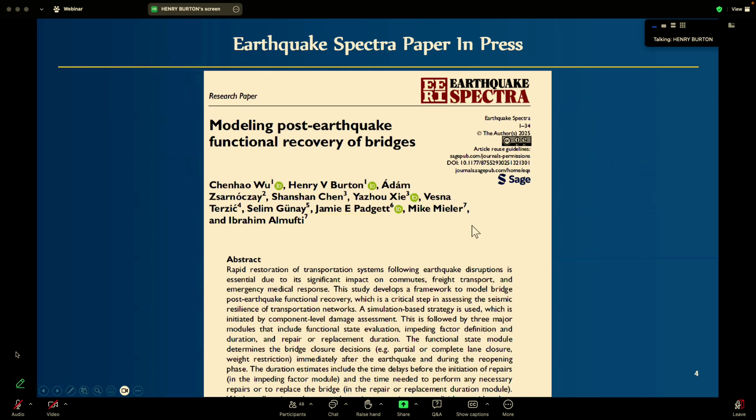So as I mentioned earlier, what we're interested in, when we say risk and resilience, our performance metric is the post-earthquake functional recovery of these bridges. We recently published a paper here that's going to be released in Spectra. I'm going to quickly go over the framework so you can get a sense for how we're assessing performance, but you can get more of that information from that paper.

Part of the motivation is that Caltrans has been continuously advancing its seismic design objectives. Initially, it was just based on life safety, where you had to evaluate your bridge for a design-based earthquake, a 975-year return period. Then in version 2.0, that was extended where you had to also look at a functional evaluation earthquake based on a 225-year return period.

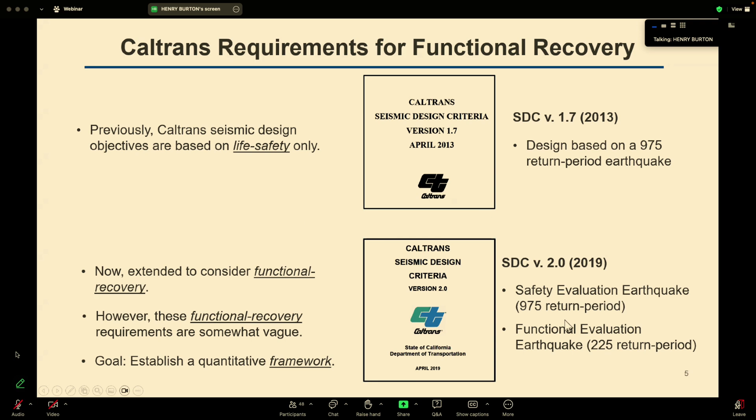Part of what we're trying to do here is get a little bit more specific in terms of how you can do functional recovery evaluation for bridges, and have an explicit quantitative framework that you can use for that assessment.

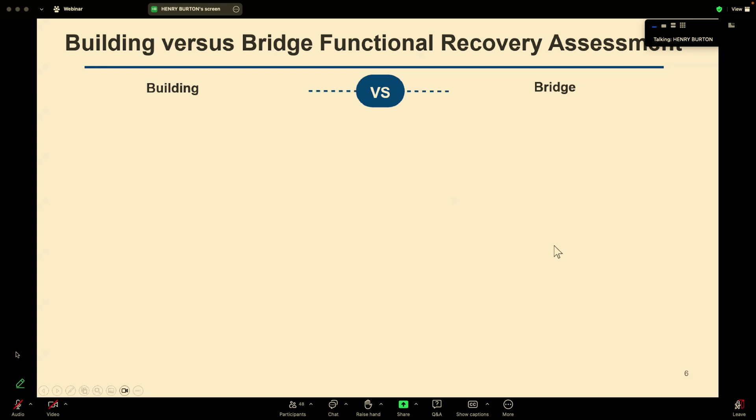Now, as I'm sure a lot of you know, there's been a lot of work done on functional recovery for buildings. It's part of the national dialogue, particularly within the earthquake engineering community, with folks involved in the building code trying to advance it. But there are a lot of differences when it comes to functional recovery for bridges versus buildings.

For example, the ownership is very different. Buildings are typically owned by homeowners and businesses, and the repair efforts tend to be very decentralized.

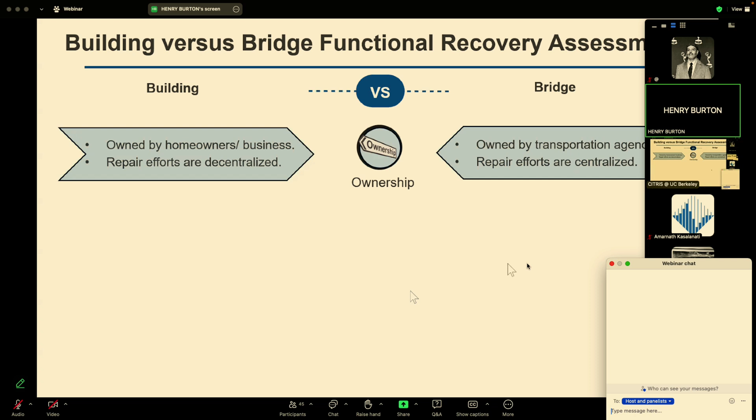So like I was saying, there are a lot of differences when it comes to thinking about functional recovery for buildings versus bridges. I talked about the differences in ownership. The way that we define the different recovery states for buildings versus bridges is also different. For buildings, we focus on reoccupancy, functional recovery, full recovery. Whereas for bridges, we think about the ways that bridge access can be limited, like lane closures, weight limits, speed limits, things like that.

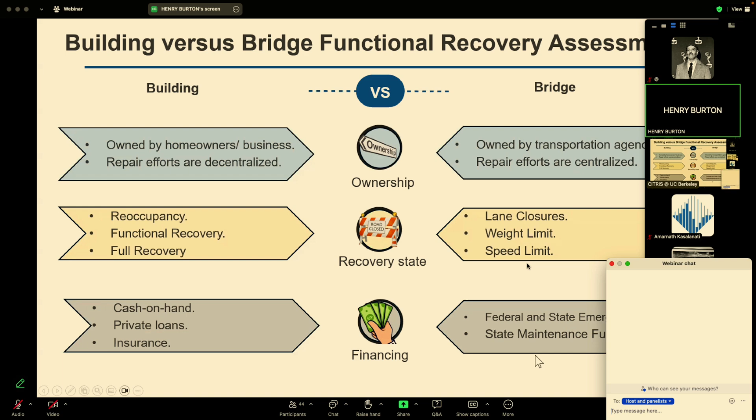And then the financing structure is also very different. Building owners rely on having cash on hand, private loans, insurance, whereas for bridge networks, there's a reliance on federal and state funds and state maintenance funds.

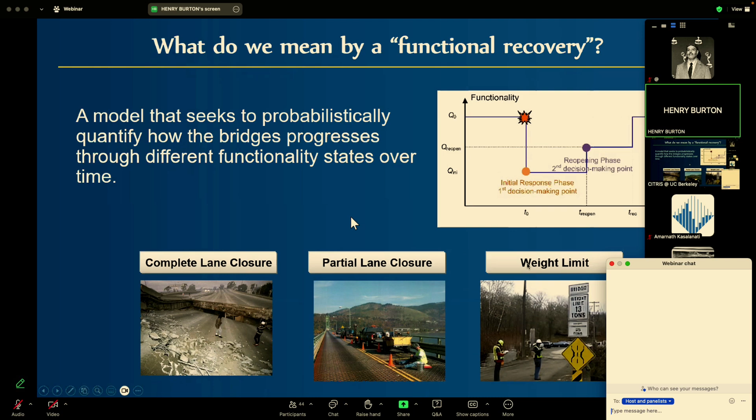So when we talk about functional recovery, what we mean is that we have a model that probabilistically quantifies how the bridge progresses through different states of functionality while accounting for these different types of disruptions that I just mentioned. This is a high level overview of the framework.

The first two steps, the hazard and damage analysis, are sort of typical, unchanged relative to the PBEE framework that we all know and love. It's this second portion here that we spent a lot of time on, things like how do you define the functionality states, thinking about impeding factors, repair activities, and coming up with the recovery time.

Getting a reasonably well representative structure for all of this was not an easy task.

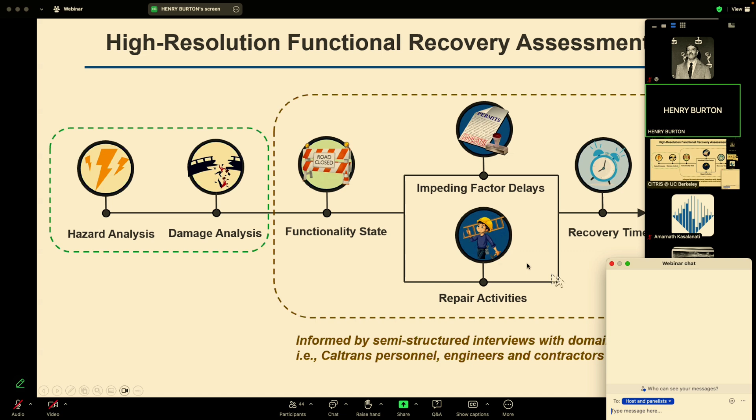We spent a lot of time in conversation with folks from Caltrans and local California engineers and contractors to get a better sense of, one, how these different organizational factors are architected, as well as what data are needed, particularly temporal or time-based parameters, and how those are used within the post-earthquake environment.

Just quickly, for the damage analysis, the framework accommodates a couple different approaches to simulating and assessing damage.

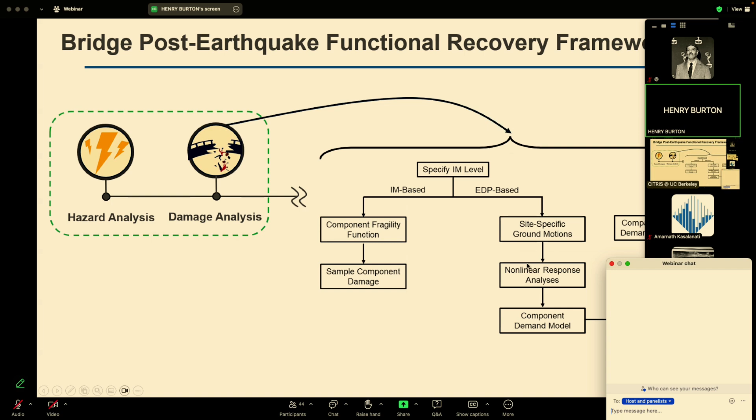You can do what we call an IM-based approach, where you simulate the spectral intensity at the site of interest, and then based on fragilities defined for the bridge component that link the shaking intensity to damage, we can sample the damage. Or you can do an EDP-based approach, where you start with site-specific ground motions, do response history analyses, and then have a component demand model that you probabilistically compare with a capacity model to simulate damage.

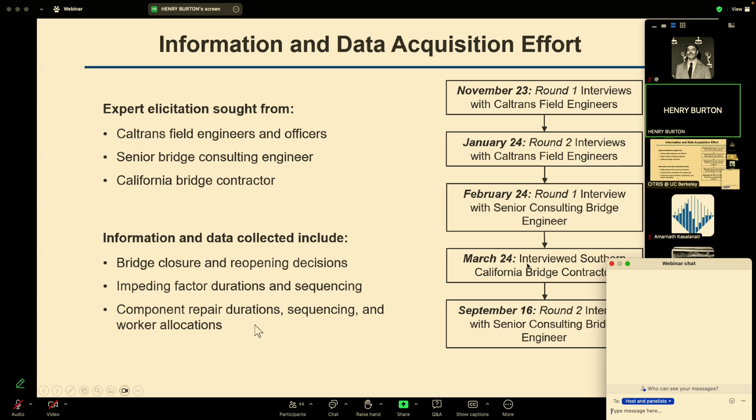I mentioned before that we spent some time getting information from Caltrans field engineers and officers, California bridge engineers, as well as contractors. We had 5 different rounds of interviews, which allowed us to collect different types of information and data, like information about bridge closure and reopening decisions, what impeding factors we have to consider, how they're sequenced, and what their durations are. Similarly, for component repairs, how are they sequenced, and trying to be realistic in terms of worker allocations.

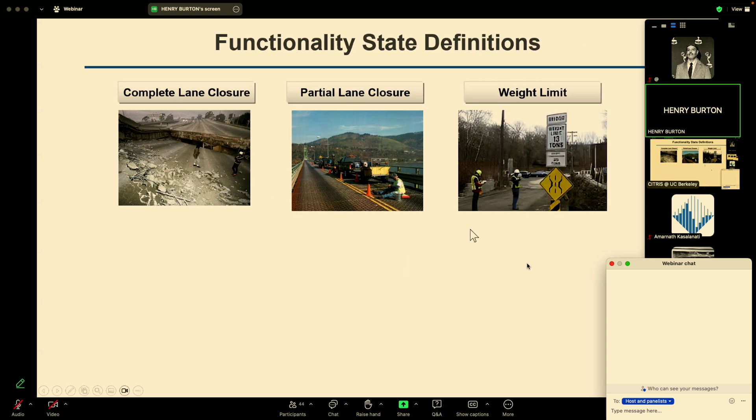So I mentioned earlier, for the functionality state definitions, the disruption of functionality is based on these three inhibitions: either complete lane closure, partial lane closure, or reduction in the weight limit. Based on that, we have 7 discrete functionality states.

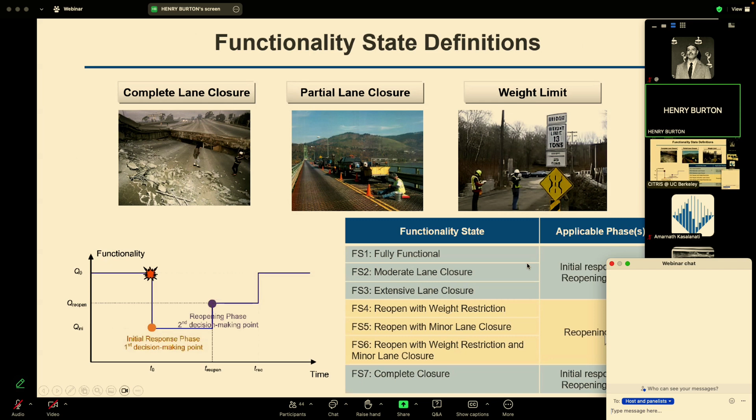4 of them are associated with the initial response, meaning right after the event. You have 4 functionality states that can happen either right after the event or during the reopening. Then 3 of them, 4, 5, and 6, are only applicable to the reopening phase.

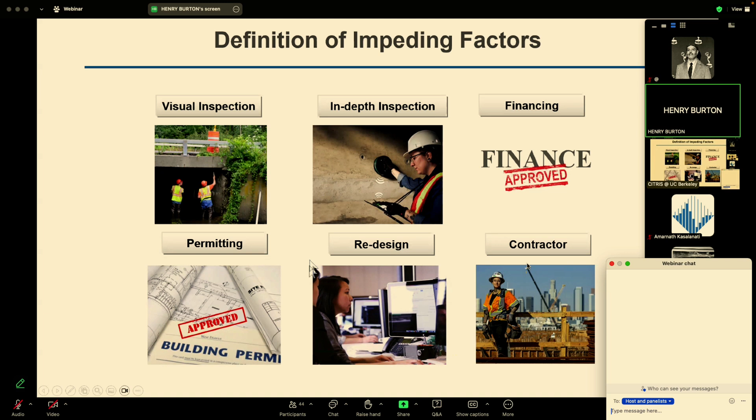I mentioned before, one of the things we had to spend a lot of time thinking about was the impeding factors. These are activities that need to be carried out before you can even start the repairs. As we know, based on experience with buildings, these can take quite a bit of time, and depending on the amount of damage, the duration can even exceed the repair time. So it's important that we consider these things.

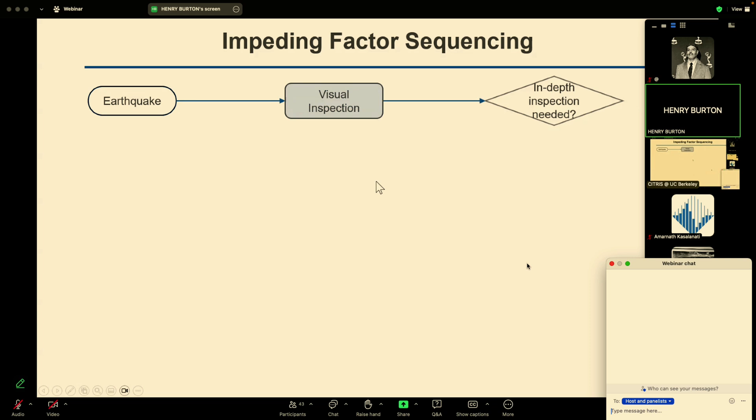In addition to considering these impeding factors, it's important to understand the workflow after an earthquake, and how that affects the sequencing of the impeding factors. Right after an earthquake, there's typically a visual inspection of a bridge, and based on that, a determination of whether an in-depth inspection is needed—cases where it's not obvious whether the bridge should be partially or fully closed. Then based on that in-depth inspection, you finalize the bridge closure decision.

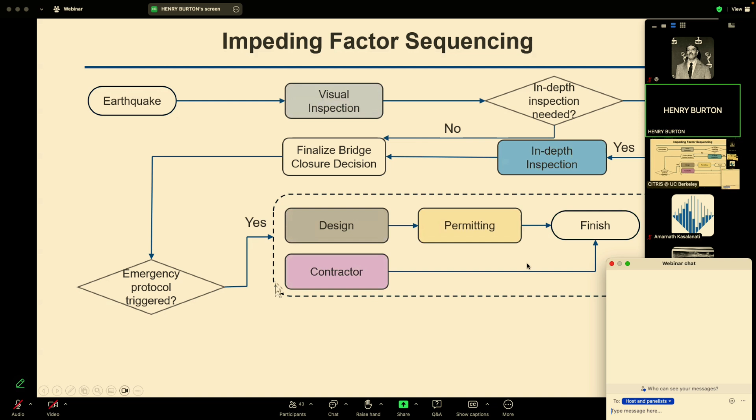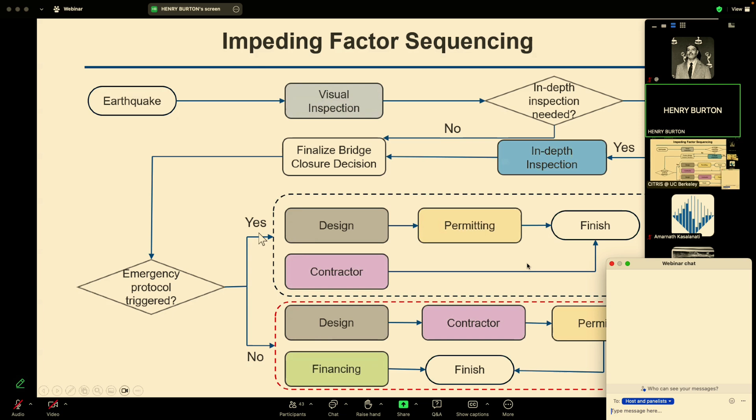Then there's a sequence of activities that need to happen: design, acquiring a contractor, permitting—and the sequence of these depends on whether or not an emergency protocol is triggered. Basically, the emergency protocol fast-tracks the selection of the contractor, done in parallel with the design. A lot of that is predetermined—there's a predetermined protocol for how to sequence this based on whether or not there's an emergency protocol. So we can consider the case with or without that emergency protocol.

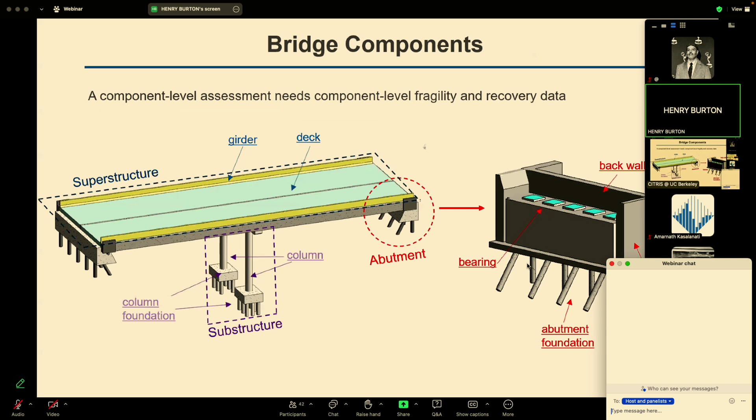Okay, so we're doing component level assessments—simulating damage to individual components, and these are the components we're considering here. For the abutment, we can zero in and look at the different types of components associated with it. In addition to understanding what the components are and their vulnerability, we need to understand how the repairs of these components are sequenced.

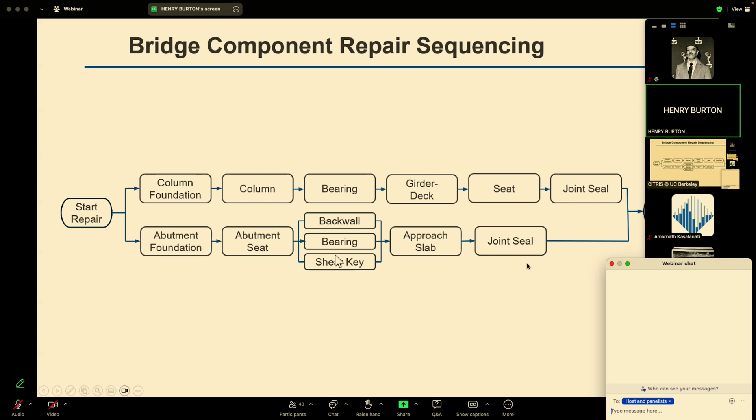So what I'm showing here is for 2 different types of bridges. The row at the top is for a diaphragm type bridge, and the row at the bottom is for an abutment type bridge, showing for those two types of bridges how the sequencing of the different types of components must be carried out.

So I mentioned before that what we've done to date is a pilot study where we looked at a single, identical bridge. We have an OpenSees model for it, and we placed that bridge at two different sites based on the simulated ground motion field. One site had a Joyner-Boore distance of about 1 kilometer, and the other about 24 kilometers.

The bridge we considered was what Caltrans classifies as an Era 3 bridge, meaning it was designed and constructed after 1971. It has two spans, three columns per span, and it's a seat-type abutment bridge.

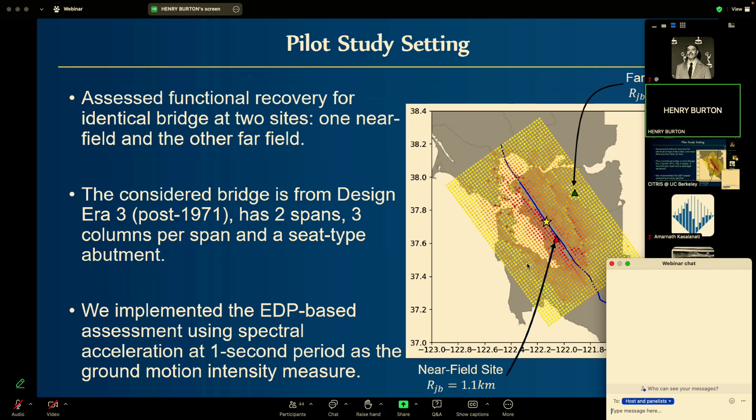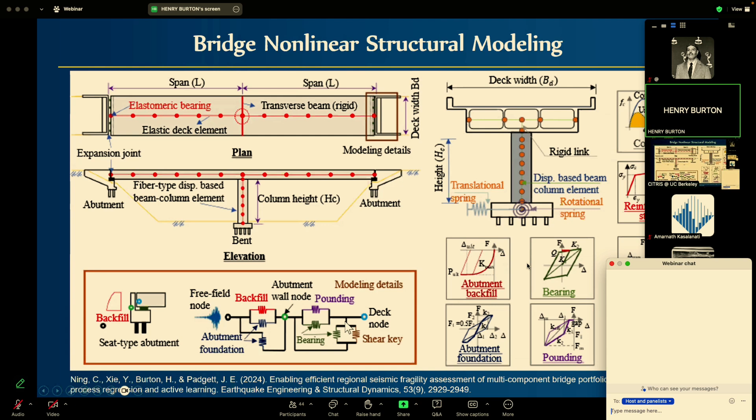We implemented the EDP-based approach to assess the performance, meaning we started with an OpenSees model. We took 50 realizations of ground motions at each site and did response history analyses. This is a quick overview of the detailed nonlinear structural model we used. I won't go into too much detail, but we're modeling in detail a lot of the components and their response, which we need to simulate the damage for.

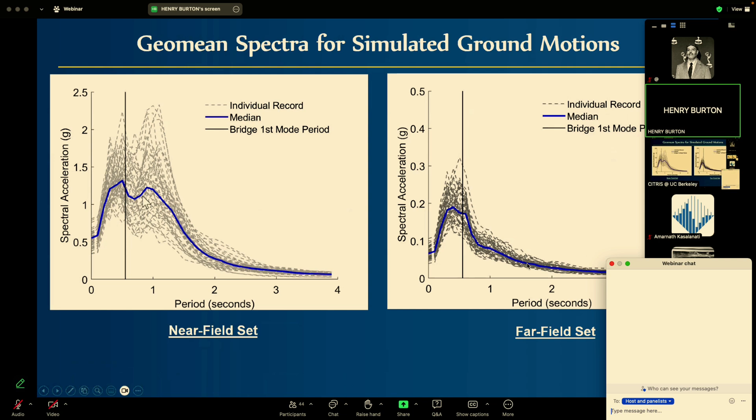As mentioned, we have two sites: one at a Joyner-Boore distance of about 1 kilometer, the other about 24 kilometers. This slide shows the geomean spectra for those two sets of ground motions. If you look at the vertical axis, they're scaled differently because of differences in intensity. For the near-field set, the peak is at 2.5, and for the far-field set, it's at 0.5. That gives you context into the differences in shaking intensities between the two sets of ground motions. The vertical black line shows the bridge's first mode period, about half a second, which gives a sense of where the modal response is relative to the spectral shape of those ground motions.

So we took those ground motions, we have an OpenSees model, and we ran the ground motions through it. What we get is a set of response demands for different types of components. Earlier I showed about a dozen or so components that we're explicitly modeling the response and damage for. Here I'm just showing a couple of them for illustrative purposes.

What I'm showing here is the probability density function for two types of components. On the left is the column curvature ductility response, and on the right is the deck unseating displacement. The one on the right is basically the demand parameter used for simulating the unseating of the deck. These are what we call the two primary components, considered the safety-critical components.

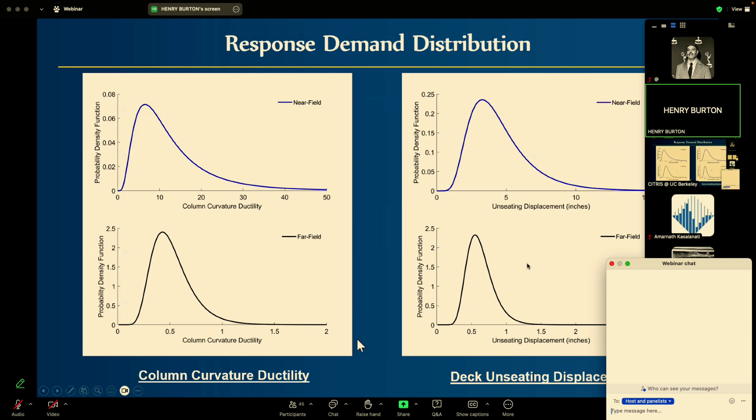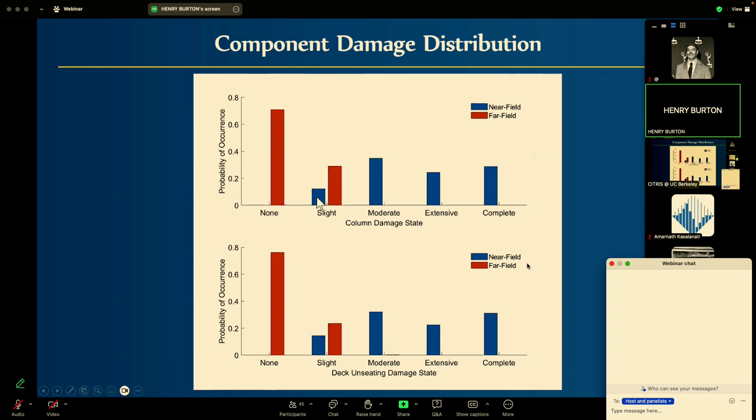Once we have those responses, we can probabilistically combine the demands with the capacity and simulate component-level damage. What we're showing here is the empirical distribution of damage for the columns as well as the deck unseating damage state. You can see the distribution of damage for the near-field ground motions is much more skewed to the right, towards heavier damage, while for the far-field, it's much more skewed towards either no damage or slight damage.

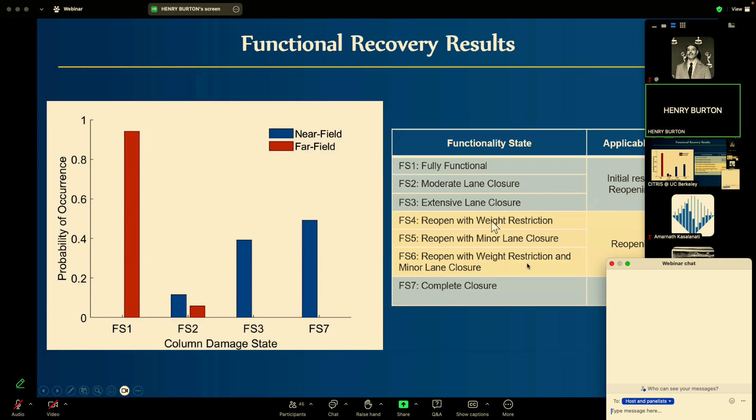As you can see, for the bridge placed at the far-field site, it's governed by functionality state one, meaning the bridge is fully functional, with some probability also associated with functional state two. Whereas for the near field, it's much more skewed towards FS3 and FS7, where FS7 is basically complete closure and FS3 is some type of partial closure of the bridge. These are just the definitions of these different functionality states.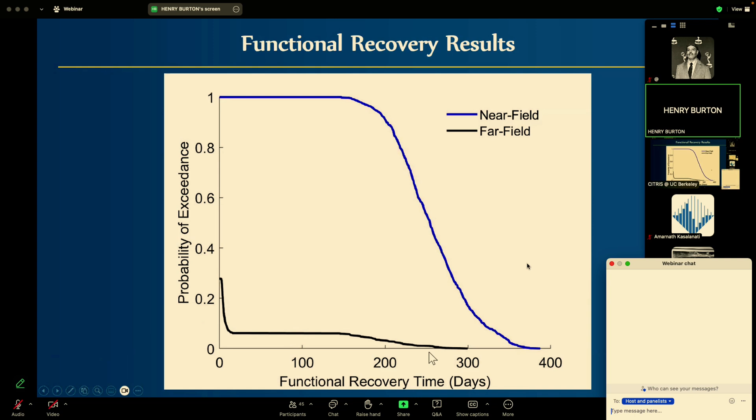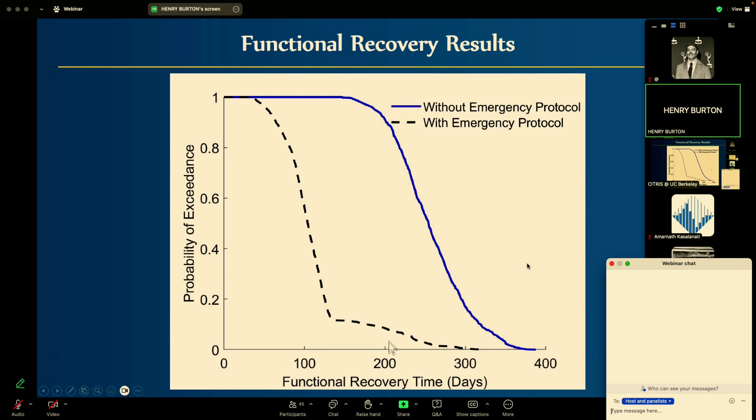The other thing we did is look at the implication of the emergency protocol. We looked at the near field site, the functional recovery CCDF for the near field site with and without the emergency protocol. Remember, part of what the emergency protocol does is fast track a lot of the impeding factors, the activities that need to be completed prior to starting repairs. You can see the effect of that here, where you have a much lower probability of exceedance for a given functional recovery time.

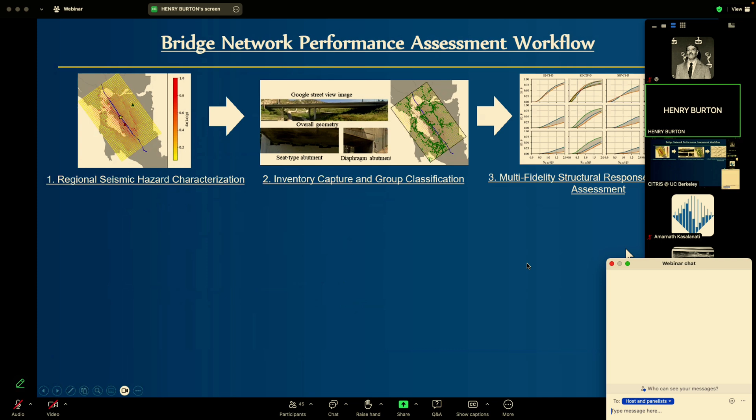So the next steps are to look at the entire bridge network, where we're going to be looking at the entire ground motion field. We obviously have to do some inventory capture and group classification to define the bridge network. Then we're going to look at multi-fidelity structural response and damage assessment—by multi-fidelity, I mean in some cases we'll do explicit response history analyses, and in some cases we'll just use fragility curves that link shaking intensity to damage.

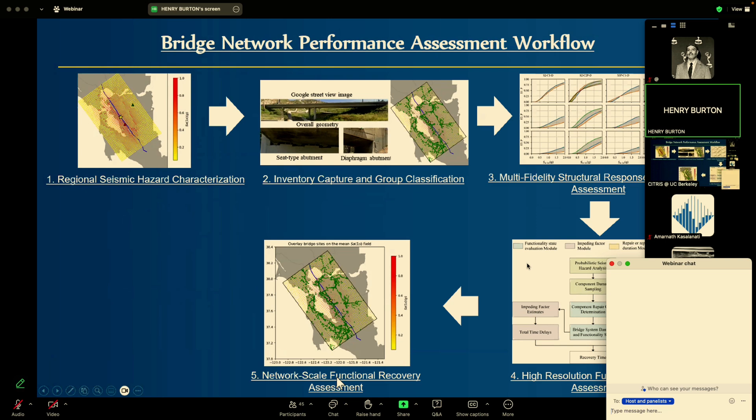We're going to be doing high resolution functional recovery assessment, meaning we'll do this for each bridge within the network, and then combine those to get some type of network scale functional recovery performance metric. So the long-term goal is to look at the functional recovery performance of the bridge network using these simulated ground motions.

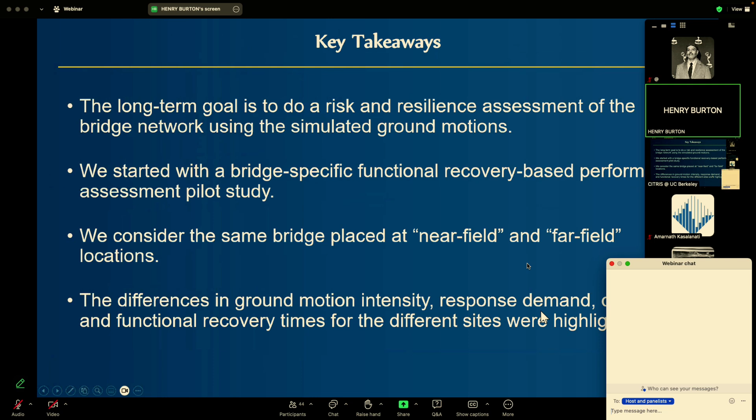But for today, I just talked about a pilot study we did on bridge-specific functional recovery-based performance. We considered the same bridge placed at near field and far field sites, and we highlighted the effect of differences in the ground motions on response demands, damage, and functional recovery for the different sites.

Is the bridge that you described near Fremont a real bridge or a hypothetical bridge? If it's real, which one is it? Yeah, it's a good question. So if I can repeat the question just to make sure I heard it—whether or not the bridge is a real bridge or a hypothetical bridge.

Basically, what we're going to be doing for this risk assessment is creating different classes of bridges, based on the design era, the type—whether it's a diaphragm or a seat type bridge—and the number of spans and so forth. So this bridge that we used today is a bridge that's in one of those classes. The short answer is that it's hypothetical, but the idea is that eventually we'll match the actual bridges in the network to our set of bridge classes based on those different characteristics.